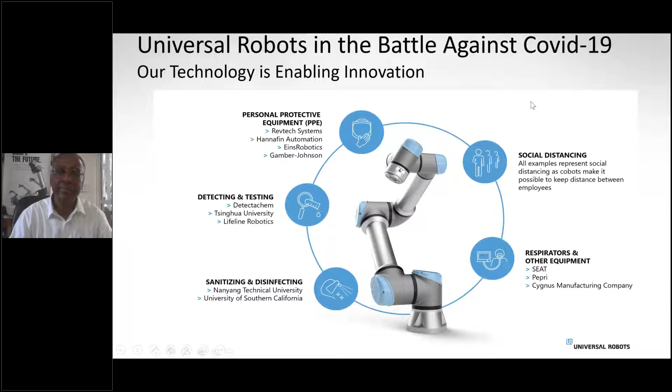Respirators, sanitizing equipment, detecting and testing - PPEs, cobots are being used for all these different kinds of things today. But we're here to learn about what it's going to do in our factories.

So there are 4 main things. I already talked about social distancing. While you see this lady in Bajaj working here, the collaborative robot is so lightweight it can be hung upside down from the ceiling, machine mounted, or pedestal mounted on the floor, using up very little space on your shop floor. So automatic social distancing, quick deployment and flexible redeployment.

This is a major one. You saw in the COVID slides, we were taking it and doing a disinfectant application. In fact, there's a company called SEAT in Spain that makes cars, and they took the collaborative robots that were doing screw driving, and moved them to make respirators about 2 months ago when Spain was topping the list. Once the respirators were made, the cobot was taken and moved back into the production assembly line.

So that's what we mean by redeployment. Did you ever think you can take a robot within a shift? The other operator calls in absent, a second shift operator, and I can move this cobot, like these people are doing in Chakan, from one line to the other, and it's now operational on that line. Or maybe my production run, I don't have that many orders on this particular VMC. I need to move to that CNC. You can do that. These are concepts you don't have with robots because they're pretty heavy, but a collaborative robot is a very flexible tool.

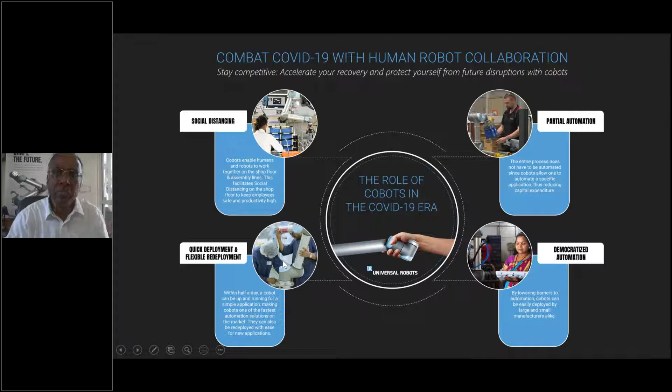It's like a human arm. It helps you. Here you can see the biggest one, the UR10, 10 kg payload. Two people are easily dismantling it, four screws, moving it to another location, choosing the program, and off and running. So if you're worried about the cost of deploying a technology like this, understand that you can mitigate the cost among many projects. It's flexible. You can redeploy it even within a shift, from location to location.

Bottom right talks about democratized automation. You see the lady who's actually programming the cobot with the teach pendant in her hand. She's no robot programmer, I can assure you. She's just the regular worker there at the Chakan plant of this SME, and she's been taught how to handle the cobot. So if you know how to handle a cell phone, you can pretty much handle a collaborative robot. It doesn't need a robotic expert.

And the top right is probably the most important concept, partial automation. So you all know when you do automation, typically 80% of the project can be done for 20% of the cost. That last 20% of the project is really expensive. Maybe you need to put a vision camera, some expensive equipment to get that last 20% of automation. Well, we're saying don't spend that money, don't spend that 80% of money, and encourage the use of partial automation. Have a human being for what he's good at, have a robot for what it's good at. The human and robot can work together in what we call HRC, human robot collaboration.

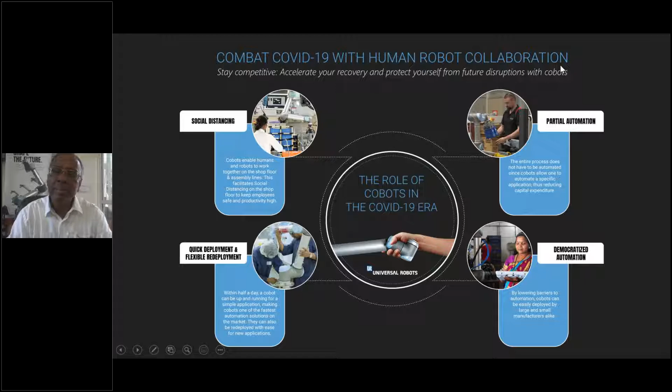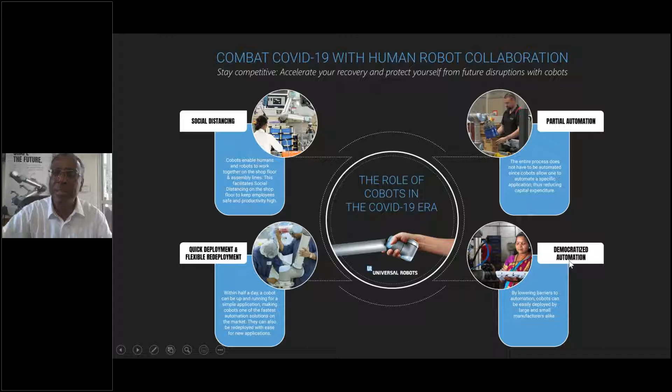So this enables you to embark on your journey of automation without having to worry about a 2 crore budget. You have 30 lakhs lying around that you can spend on a particular automation project. Get started with a cobot. So I don't think it should deter anybody. Like I said, it's democratized automation. Everybody can afford it. And as India climbs up the manufacturing chain, these kind of technologies need to be embraced.

So here's a typical example of a CNC machine on the left-hand side being serviced by a robot, an industrial robot. You have a big fence and space used up on the shop floor because it's unsafe, right? A robot is unsafe, we've known it to kill human beings. We're all familiar with the Maruti operator who got pinned next to a cage by a robot. And therefore, you do a collaborative robot, which is on the right-hand side. Notice it's on wheels, I can move it from machine to machine. I don't need to put a fence around it, because if it does impact you by any accident, it doesn't crush you in any way. Every motor size is designed to work safely with a human being. That's what makes it collaborative.

So flexibility, where I can move it around, extremely lightweight, easy to program, and no fencing required. These are some of the major advantages you can hopefully see immediately. The category of these robots are called power and force limited robots.

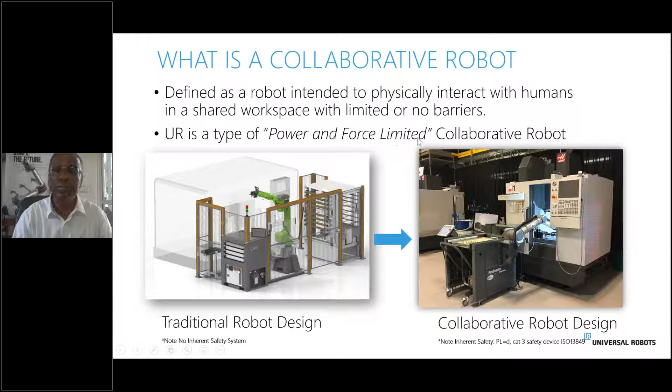This is a picture from Bajaj Auto. By the way, Mr. Rahul Bajaj had the vision of having 50% of his assembly line should be women, and we have helped him accomplish that. So by putting a cobot up here, you see the engine blocks of the 2-wheelers coming. There's a nut runner, there's a light and a camera that's looking at, okay, these 12 bolts need to be tightened. This lady used to tighten 800 bolts a day manually. It becomes very tough, probably becomes a manual job for a man generally. Today, with the cobot doing all the hard work, it doesn't matter who's working here, right? It could be from your pool of women labor or men. So women empowerment was a big factor in terms of Bajaj's usage of this technology.

It also, they told us, contributes to a clutter-free shop floor. By putting it up there on a small gantry, I don't use up any floor space. So clutter-free shop floor was another advantage that they pointed out.

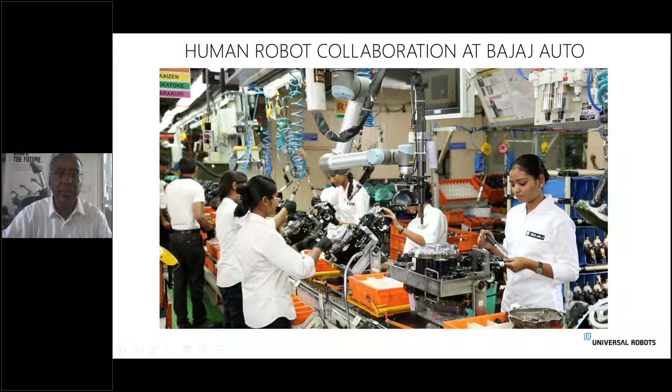So once again, if you're wondering what is the difference between an industrial robot on the left and a collaborative robot on the right, I think this picture says a thousand words. You don't need the fence. You can move it around. It's not a fixed device like on the left-hand side. I can move it from machine to machine, operation to operation.

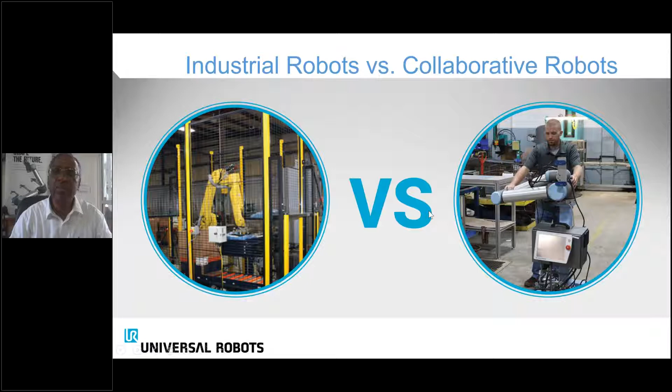I brought it home, by the way. I don't have three-phase power at home, but it's plugged in and it's working. So these are some of the advantages of a very flexible tool called a collaborative robot.

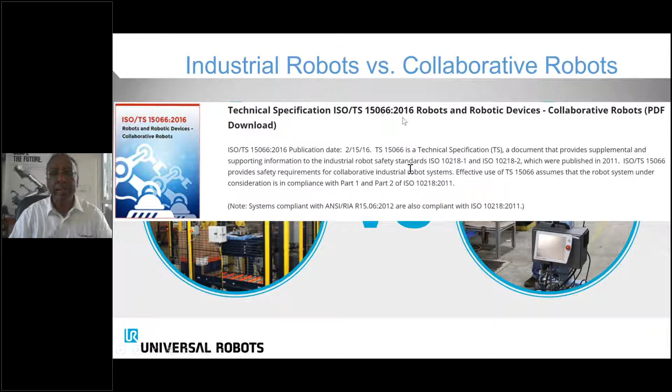If you're wondering if it follows all the standards, there's an ISO technical specification 15066 that was passed for robots and humans to work together. Before this standard, all the laws or standards were passed based on how do I keep a human being safe, how do I make sure he doesn't get crushed by that industrial robot. Well, since 2016, only 3-4 years ago now, this technology has come to the forefront where humans and robots can indeed work together.

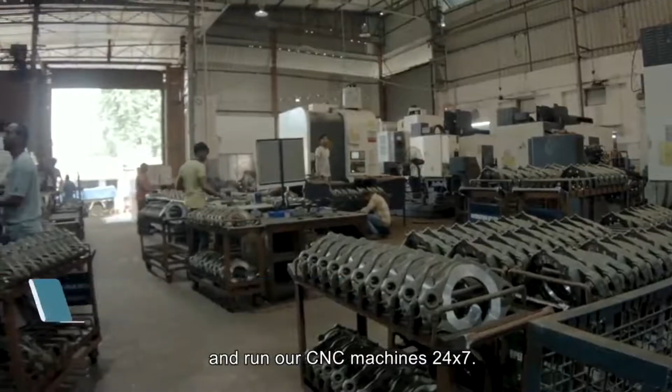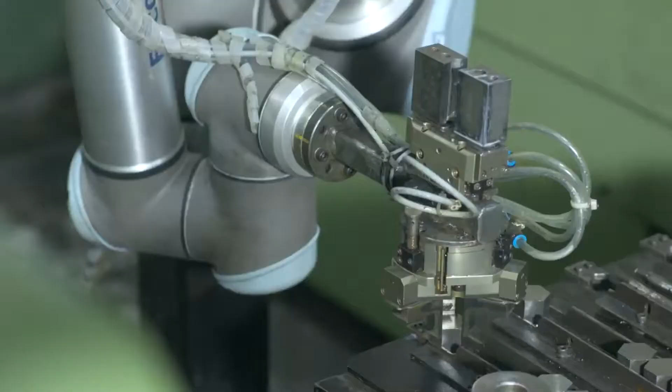It's been 1.5 years since we've been using UR cobots, and it's been a great experience for us. I still remember when I saw the cobot for the first time, I told my dad, this is what we need for our components.

We have two divisions - a small component division and a big component division. And for the small component division, I think there's no better robot in the country than UR cobots.

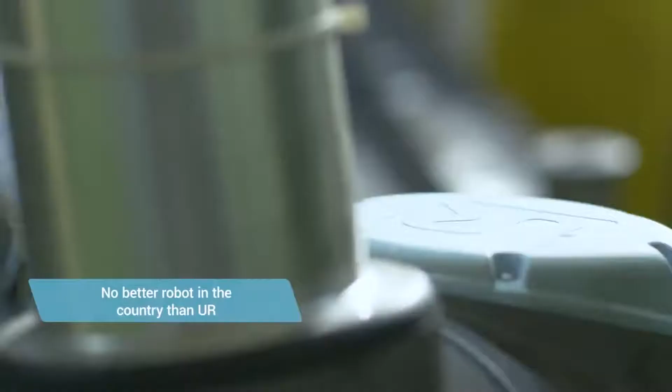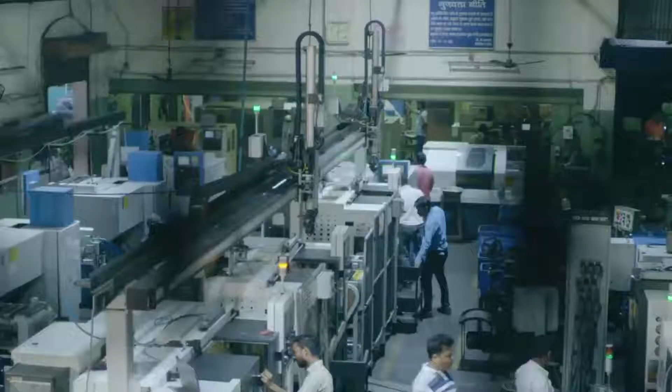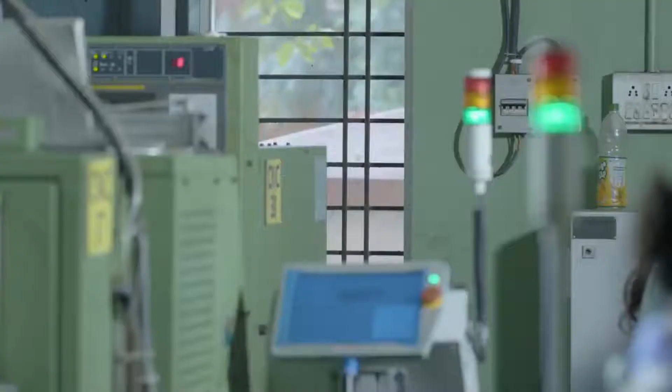When you're an SME, land is extremely valuable for you. Imagine putting these huge robots in your factory which take up so much space. You need to put a fence around it. Instead of 6 machines, you'll only be able to put 2 machines or 4 machines at max. But in case of UR robots, it can be fit into the space between 2 machines that you have in your factory. You just put it there, plug and play, and you're good to go.

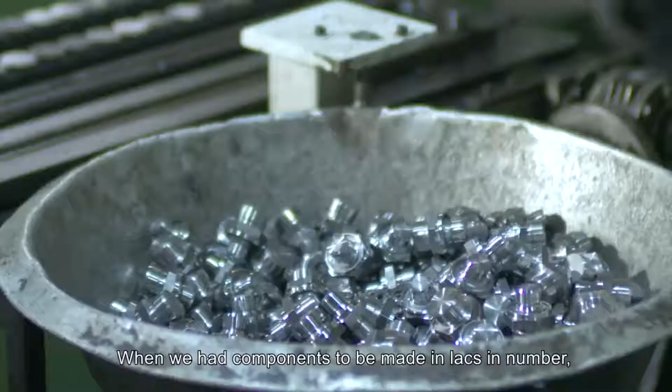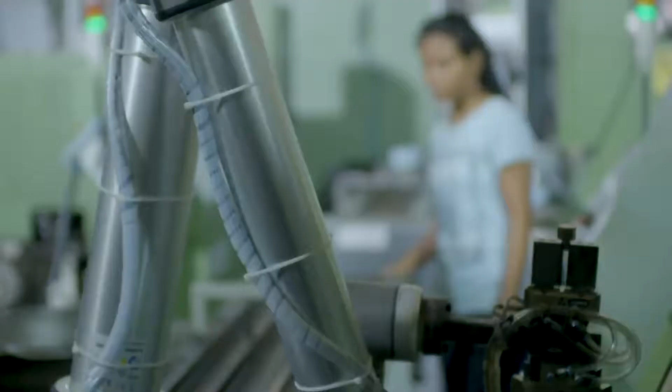They're actually cobots, collaborative robots as you call them, which work side by side with my workforce on the shop floor.

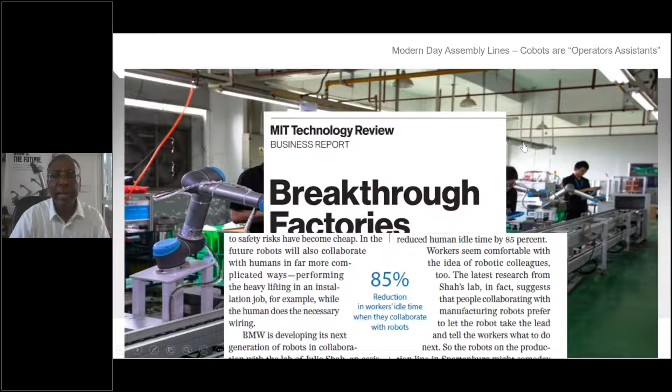Moving forward, you also see the man-machine assembly line of the future, wherein a human being and a robot, a human being and a robot, have automatic 6-foot distancing between the people on the assembly line. And not just that, MIT has done a study which shows that when you have humans and robots working together, you have an 85% reduction in a worker's idle time. So this is pretty significant, allowing us to bring efficiencies.

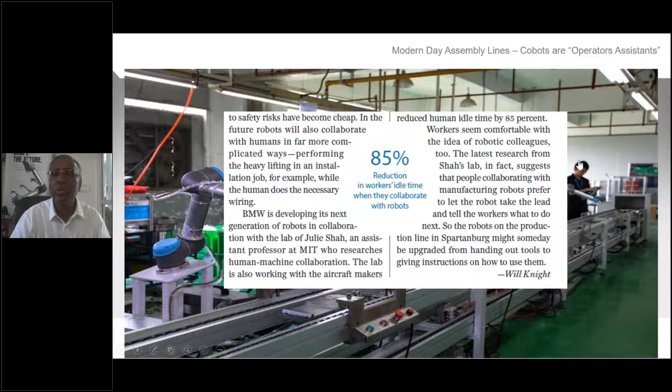As you try to be more efficient now, coming out of COVID, understand that having a human and a robot work together—shown by an MIT study, not a marketing study from our company—shows you can have an 85% reduction in idle time and the associated improvement in productivity and throughput. That's just one of the benefits. You have a lot of other benefits, like the quality of your product going up dramatically. It plugs into a single phase power outlet, like I've shown right here behind me at my home. It's very easy to program. It's got a teach pendant, and with this teach pendant, we can very easily show any operator how to program it.

I can actually show this to you today on how to program a cobot. Every axis will move plus or minus 360 degrees. This is unprecedented in the world of robotics. When you look at typical robots, the base joint may move from here to here, about 270 degrees. We're talking plus or minus 360, which is 720 degrees. Every joint can move like that.

What's the benefit for you? The benefit is it can operate in extremely confined spaces. In an MSME, space is huge and it's very important that we conserve as much space as possible. You can move it from location to location, you can mount it up there like Bajaj has done, and it consumes very little power.

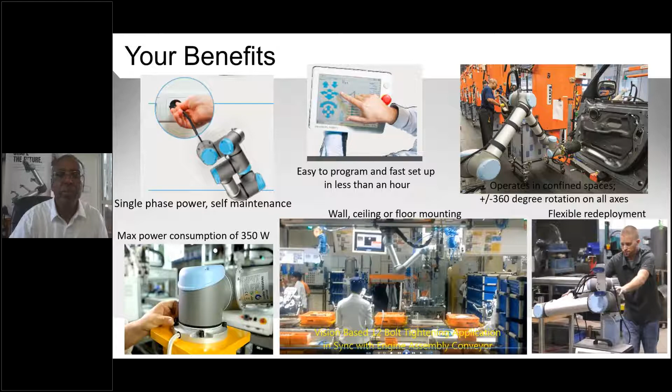The largest one we have, a UR10, 10 kg, actually UR16, will probably consume about 350 watts. A typical UR5, which most people use on CNC machines, 5 kg payload, will only consume 150 watts, like the light bulb in your office. 150 watts is all it consumes. So extremely efficient in terms of energy usage too.

But don't let all this simplicity fool you. There's a lot of technology that's gone in to give you this capability. In fact, there are 65 patents built into the product in robot safety, construction, trajectory control, etc. No less than 65. And we have over 45,000 deployed in the globe today, so it's not like you'll be the guinea pig trying this out.

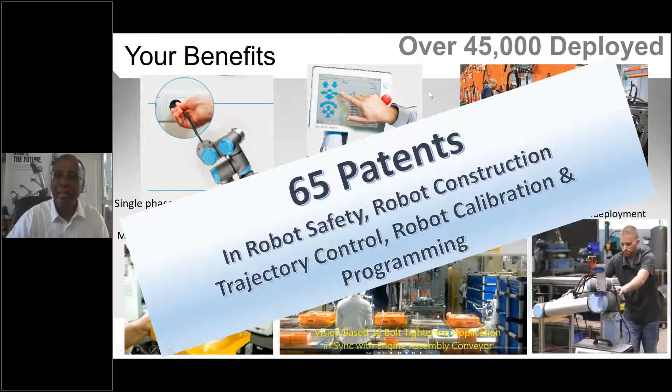We have many installations in India also, like this picture will show. These are small SMEs around the country, Craft and Technik. They make products that mostly they export, for aircraft parts and those kind of things.

New Engineering Works, the middle one on the top, I think you heard the story. They're making small components for commercial vehicles, Tata. Bottom left, Shruti Engineers, a small company with about 20 people and 10 machines. They put a cobot to load and unload to make it easier for the operators, to improve the precision of the operation.

We have a customer in Gurgaon who got tired of the quality when he had a painter doing the painting application. You had to do 8 coats of paint, and after 6 hours of work, maybe they put 8 coats or they do 6 coats. Either way, it will be rejected when the etching goes on. He had a lot of problems with quality. When you put a robot, you tell it to do it 8 times, it's going to do it 8 times, from part number 1 to part number 1 million. So quality just goes up through the roof.

And for ergonomics, the bottom right one is a dal manufacturer in Chennai. This lady used to carry these dal packets and put them in a sack one by one as they came off the assembly line. Now the cobot picks up the dal packets and puts them in a sack. All she has to do is drag the sack out and put a new sack in every so many minutes. So great stories on SMEs using it.

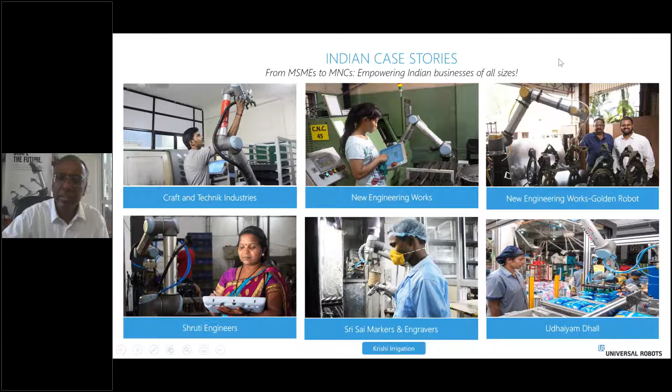I also want to share 2 major concepts of collaborative robots. One is called partial automation. I've already explained this, where you don't need to spend the big money, say 2 crores of rupees, to do complete automation. Like this operation you're seeing, you may ask why is the man there, couldn't we have automated that, couldn't we have had something make the box? Notice the little cardboard box lying at the back, you could have put a conveyor to bring it automatically. Sure, but then your cost would have gone up. So we're saying, no problem, you've got 25 lakhs to start with, put 25 lakhs in, put a UR5 in, put some simple collation process, have the human being there, and I've brought a cobot into my factory.

I'm getting the benefits of a cobot, of Industry 4.0, of one of the top 50 technologies. And I'm getting my people used to working with a cobot, human and robot working together, heavy lifting being done by the cobot. Maybe as this progresses, I can put another cobot in. So this supports the concept of partial automation. You can get started small.

And on the right-hand side, I love this concept of flexible automation. This is in a cosmetic company. Notice there are 2 robots on this trolley, one is a UR5, 5 kg, and one is a UR3. And they happen to have about 12 presses. They make cosmetics like powder puffs and lipsticks and all that kind of stuff, a company called Coty.

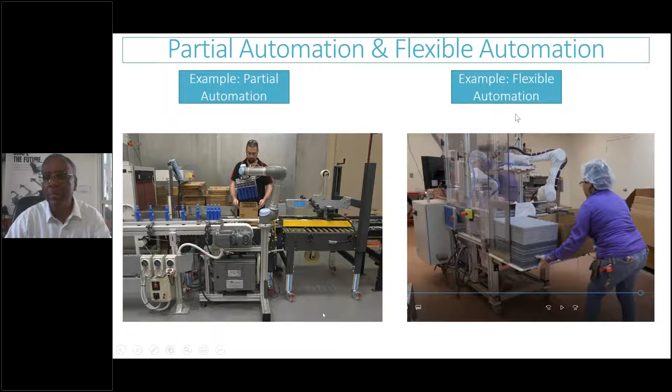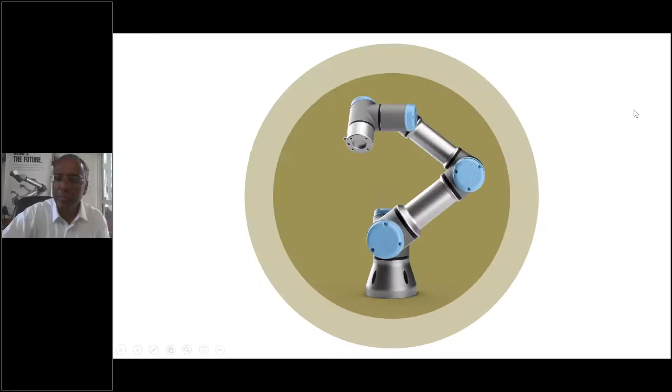There's one testimony I'd like to share. Dell, a customer in Chennai, makes servers and laptops. Here's what the plant manager has to say: 'Our first cobot, installed 3 years ago, is on a very high flow line with 3 to 4 units every minute. This means the single cobot has gone through over 1 million production cycles to date with zero downtime. Reliability is one of the biggest positives.' That's Mr. Navneet Kejriwal, the head of manufacturing, commenting on his experience deploying cobots. In fact, he's a hero in Dell now because they have 10 plants around the globe, and he was the first to put in a cobot. Today, all 10 plants have cobots after seeing what the Chennai plant has done. It's a very proud moment for us in India, showing the other plants what can be done.

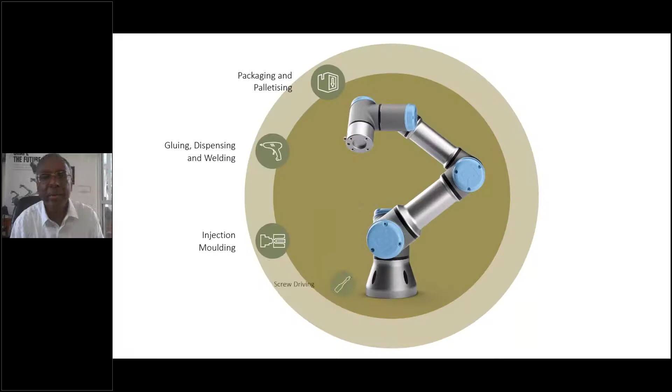Assembly, where I need to put parts together. This little device called Alexa that you have at home—you talk to it and say 'Alexa, play so-and-so music track for me'—that assembly has been done completely by cobots.

Pick and place: from a conveyor, taking something and putting it somewhere else, a very common application. Quality inspection: I put a camera at the end of the cobot. BMW, for example, uses it to measure the distance—the gap, as they call it—and it's exactly the same whether you look at the bonnet, the trunk, or the doors. So they're using cobots with a laser to inspect the gap, and if it's not the same, it goes for rework.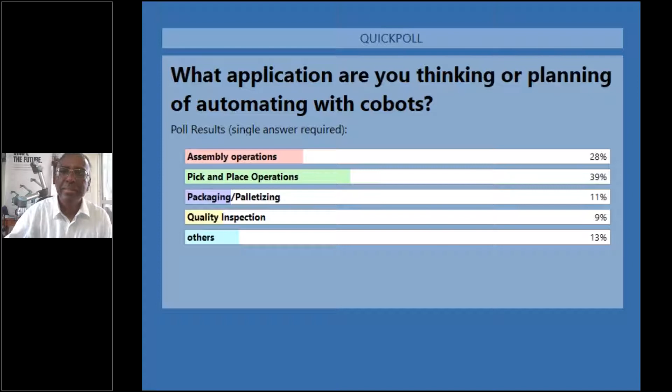Some of the benefits you are getting by using a cobot, let's say pick and place was the major application you mentioned, is increased capacity, so your throughput can definitely go up. We've also seen a dramatic improvement in quality. In many cases, our customers are telling us, I've had 0 quality defects once the cobot was involved in the manufacturing.

Because we all know that human beings, while we're extremely good and extremely smart, after 6 hours of repetitive work, we get tired and we make mistakes, right? Sometimes deliberately, sometimes not, but quality does suffer, and it's the owner of the company that suffers because of that. We've seen cobots minimize waste, and I'll let you read these, some of the benefits.

It's quite obvious, but these are the benefits that our customers have told us about.

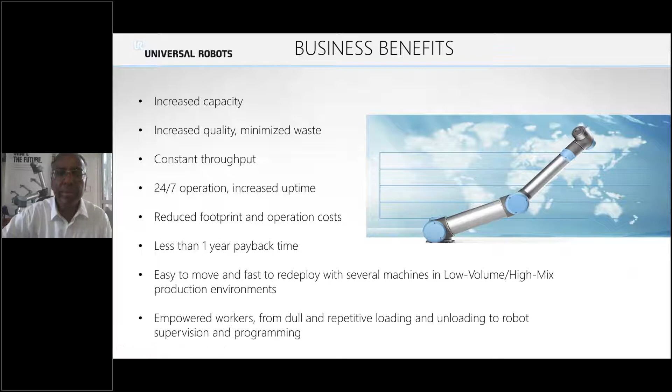This is just an ROI calculation of a new engineering works, an SME. He took a 30 lakh loan, and had he used labor for 3 machines, 3 shifts, he would have paid 10 lakh 80 thousand per year one, with a 10% escalation in year 2 and year 3. But because he borrowed 30 lakhs from the bank, paying interest of about 15%, with depreciation of 15%, in year 1 itself he had a positive cash flow.

Had he had labor, he would have paid 10.8 lakhs. If he had just the cobot, his costs were 9 lakhs. So even from year 1, he had a positive cash flow. In fact, he paid off the entire 30 lakhs within 2.5 years. In his case, after that, he's been printing money essentially.

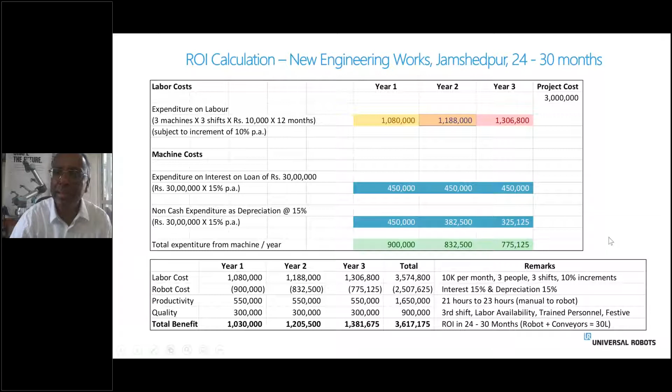In fact, this guy, within a month, I got a call from him after we put the first robot in, and he said, boss, I need you to come urgently and put 5 more in. We suddenly realized that we are leaving money on the table. I need to put a total of 6 robots. My bank has sanctioned this loan, please come and do 5 more. So that was a great story for us, which is why we have made a video of it.

Some of your questions may be about the robot itself. Notice that we talk about a UR3, which is a 3 kilogram payload, which basically means, let's take a UR10, a UR10 can carry 10 kilograms at this point, and about 200 mm offset from that flange also.

So 10 kilograms means your end of arm tooling and the payload. You can probably lift about 8.5 to 9 kg payload with, let's say, a 1 kg end of arm tooling.

Now, yes, we can go up to 16 kilograms. In the case of the 10 kg payload, we can go up to 1.3 meters reach, the working radius, which means the diameter is 2.6 meters.

Each one of these, and by the way, why is the E? E is the latest version, just like your cars, you have a BMW 3 and a 5 and a 7, same way. We've got our 5th generation of product, which is our most modern product with the best functionality, touch sensitivity at the end. It's called the E series.

We also have just the UR3, just the UR5, and just the UR10 without the E. We've been selling that for the last 10 years, it's still very popular in India. Obviously, the cost is much less than the E series. But if you're into R&D and looking at some of the more higher end applications, you may want to look at the E series.

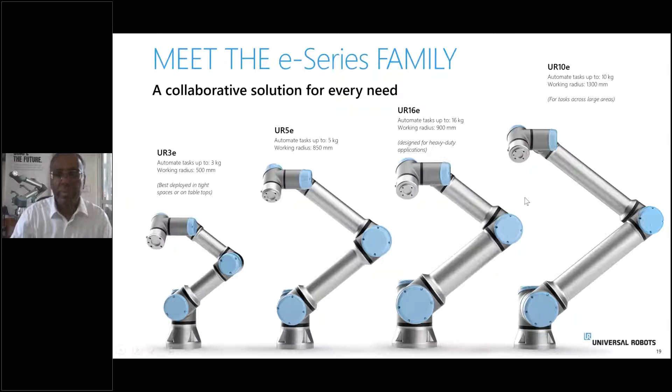I think it will contribute across all manufacturers because you now have a larger pool of labor to choose from, especially nowadays when it's tough to find labor.

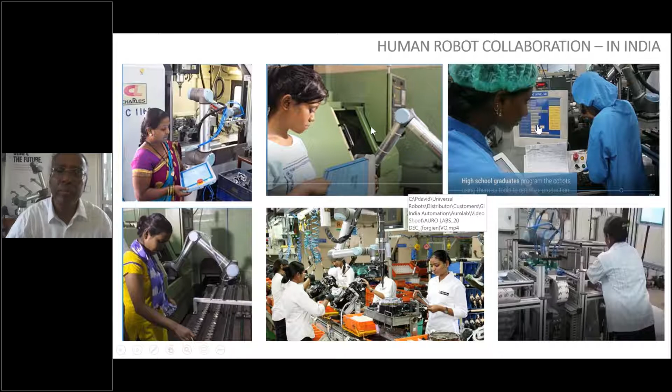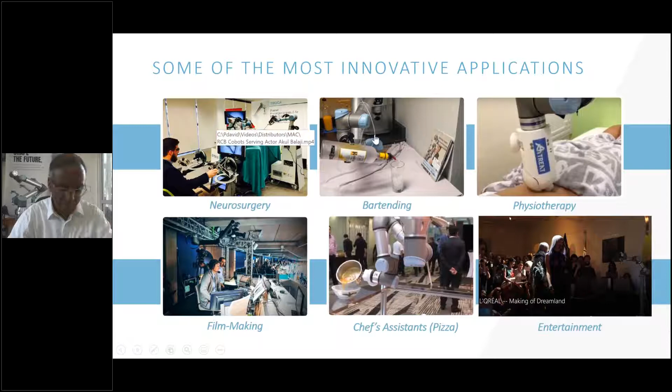It can be used in many applications. We've used cobots in neurosurgery, in bartending, in physiotherapy, in kitchens. In Bombay, for example, there's a cloud kitchen that was having problems with consistency of the dough. How do I make the pizza dough consistent? First shift makes it different, second shift makes it different. So they took a cobot to ensure the consistency was the same.

Very ingenious applications. The Bajaj example I'd give you is they bought one robot, I think in 2012, and the very next year they bought 23 robots. Why? Because they bought it for their R&D center, and they suddenly realized, hey, this is so easy.

I can make it do dispensing. I can make it do my decal application on my petrol tank to put that sticker. I can use it for dispensing the sealant, for welding, for picking and placing, all that stuff. So typically an R&D group, if they get their hands on something like this, understands the application better than anybody else. You'll be able to figure out many uses for this tool. Once again, I call it a tool, not a robot. It's really a very functional tool that you can make do exactly what you want it to do.

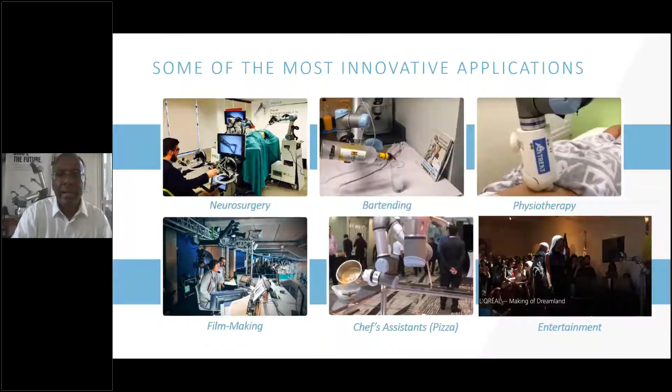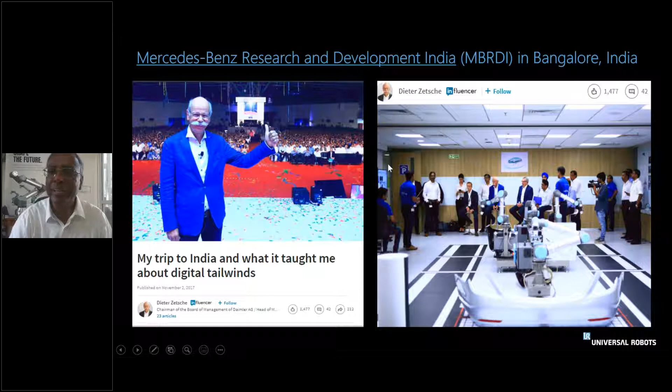So do we have much more history? No, unfortunately we're only a 10-year-old company, but we have good reliability on these machines, and if you treat them well—in other words, clean them a little bit, there's no real maintenance involved, there's a fan in the control box, make sure it's not clogged with dust, some basic things like that—it will give you extremely good service.

This is a little technical. I don't know whether you want to get to this level, but if you're interested, I'm sure you'll call us and we'll talk in more detail about the E-Series, which is our flagship product.

I think the main thing is robots generally don't have a sense of touch. We have now taken a force torque sensor and put it right here, which means, for example, I just got a customer recently in Delhi who has a gear and a spline, and he wants to align the gear wheels with the spline and then push the two together. Now that requires a little bit of forcing and seeing—oh, it didn't work, then move it, then force it again. A force torque sensor is ideal for such applications. Just like a human being has a sense of touch, the force torque sensor gives the cobot a sense of touch.

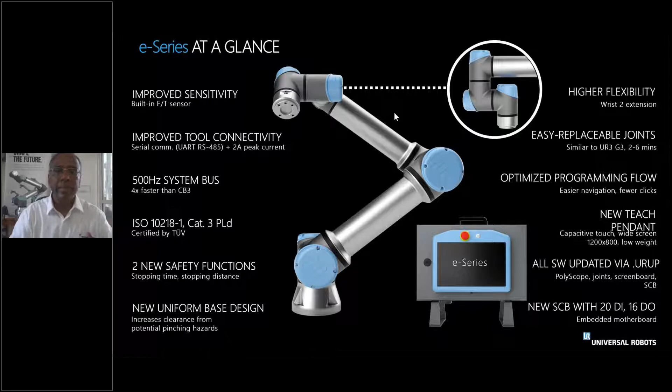Is that from Universal Robots? No, it's from a third-party supplier who took our software. He has developed his own intelligence, like Schunk has done with their 2-jaw gripper, and he has created a tool for you to use. That is called UR Plus.

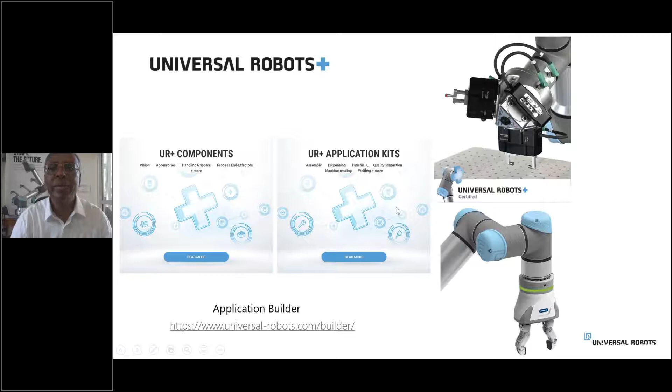All the software to configure this will show up on my teach pendant. That's how we certify that it works with UR. So if you teach your operator to use our teach pendant, you are teaching him how to use a third-party device, whether it's a gauging system, 2D cameras, 3D cameras, 2-jaw grippers, 3-jaw grippers, sometimes not even electronics. Some people say their operator drops the teach pendant on the floor and cracks it.

So someone has produced a nice little jacket or shield for it. Things like that. All these things that we don't do as a robot company, we want to be the best platform for you to use, and we expose it to third-party vendors to give you the things they're experts at. Haptic gloves, software to do remote monitoring of the robot - all that is available through what we call UR Plus.

It's coming up to an hour, so I'll take a few more minutes. If this is interesting to you, we have something called an Academy - UR Academy - in which, in 87 minutes, you can become a programmer. Just go to our website, Universal Robots, click on education, and there are 9 modules you can go through free of cost. Learn how to create a program, how to attach an external device, how to set safety settings for your operator, and within a few hours you will learn how to do this.

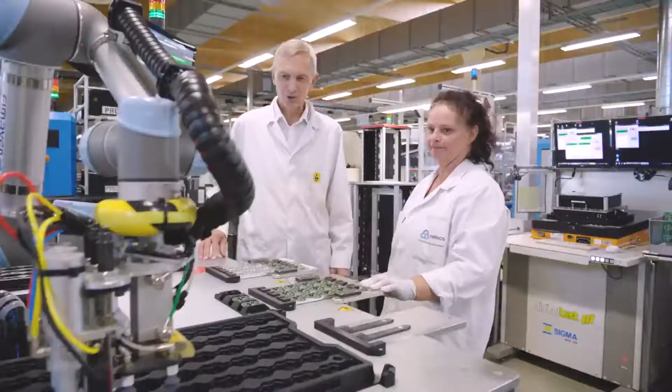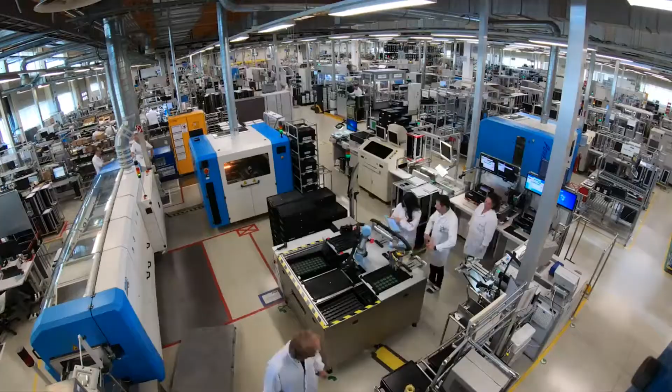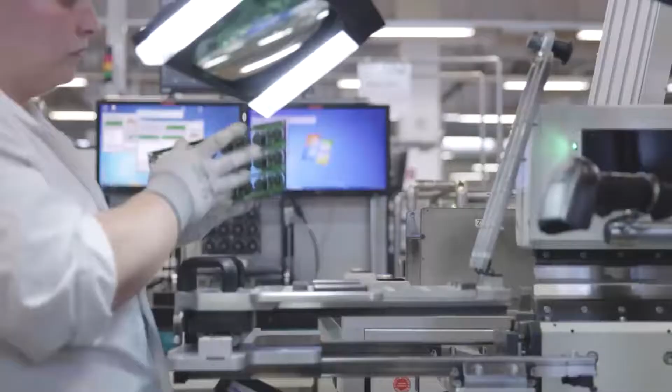Your car contains a lot of electronics. It is quite possible that some of these components were manufactured by cobots at Siegendorf. Melecs is the largest service provider for electronics development and manufacturing in Austria. We are the market leader in products such as control units for intelligent all-wheel drives. Besides original equipment manufacturers, Melecs customers are mainly automotive suppliers, with Melecs being their single source provider of the entire value chain - from development, validation, industrialization, production and logistics. Melecs offers zero defect quality and 100% delivery reliability at competitive prices. This can be guaranteed only by automating as cost efficiently as possible.

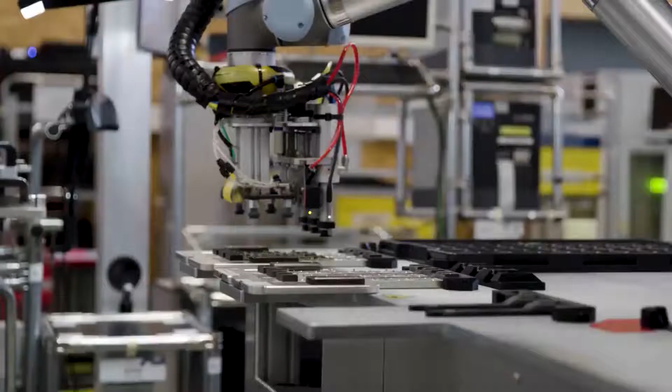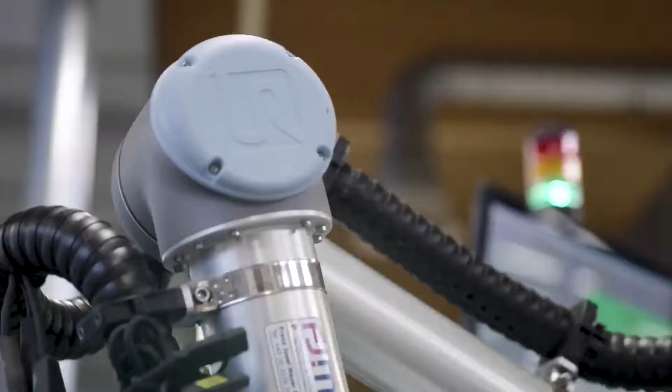That's why we use a cobot from Universal Robots here for packaging small electronic components. Cobots are cost efficient, easy to use, and we can realize projects directly with our own engineers. In addition, we relieve our employees of monotonous tasks. The UR5 handles packaging tasks. Our primary goal here was to meet the cycle time - the target is to pack each PCB module in 3 to 4 seconds. With support from the Fraunhofer Institute, we were able to realize this project successfully.

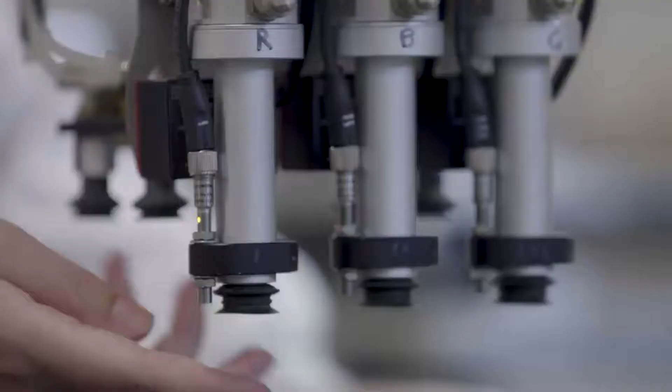The cobot is equipped with a gripper specifically developed for this application. After depanelization, the employee places the PCBs in the robot's working area. The robot then scans the PCBs, picks them with the flow gripper, and places them in a tray. Once the tray is fully loaded, the robot grabs it with the vacuum gripper and places it in a box. As soon as a box is fully loaded, the robot closes it and makes it ready for delivery. We were able to transfer the monotonous packaging work from the employee to the UR, enabling us to use our employees in more profitable ways elsewhere. The bottom line is a 25% increase in productivity in this manufacturing cell.

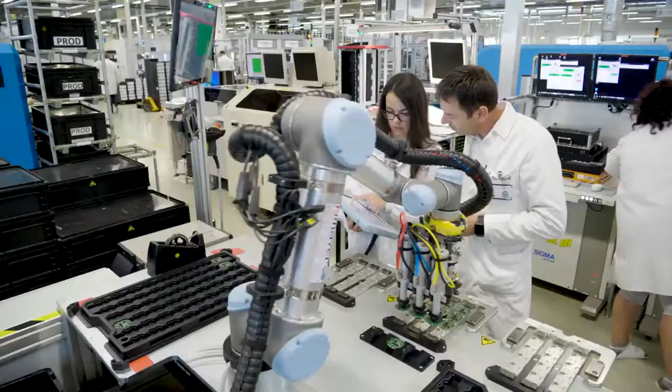The cobot moves slower in the areas it shares with humans. We also cushion the gripper tips so the employee can work absolutely safely next to the robot.

To me, this project proves that it is possible to realize really short cycle times and high volumes with collaborative applications. The project was very successful. The system runs reliably in production, and we were able to achieve a clear competitive advantage. We package 2 million products per year more cost efficiently than before. Due to the success of this first implementation, we will use cobots again for our next automation projects.

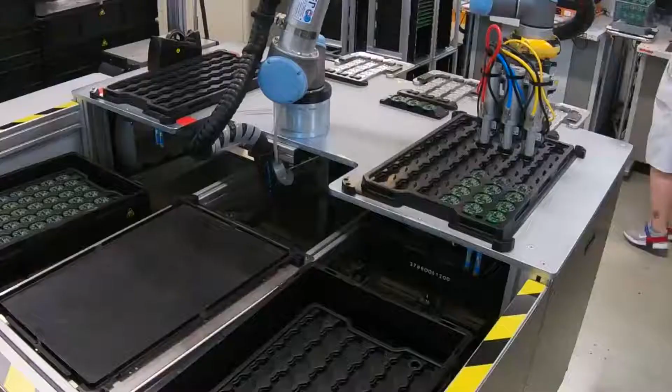After being packaged by the UR cobots, the circuit boards find their way into cars all over the world.

Thank you. That was good. And...

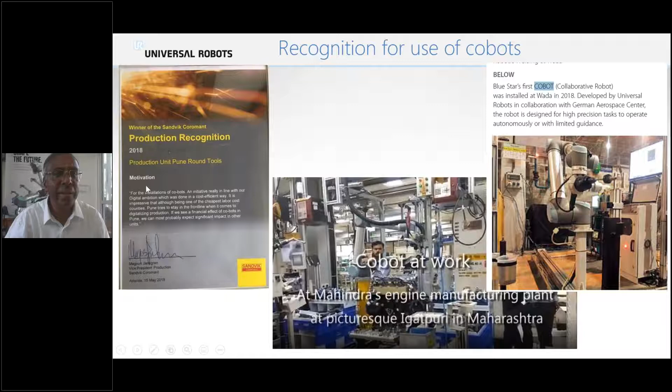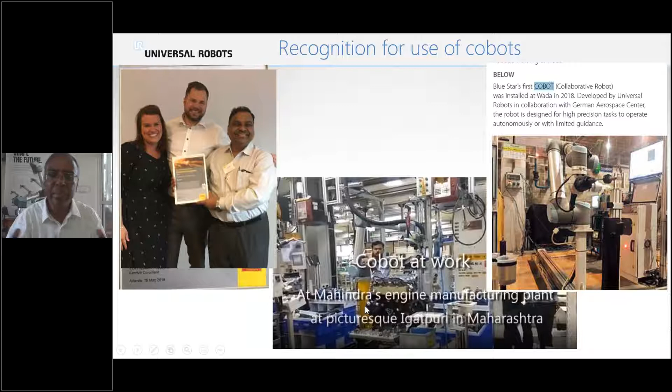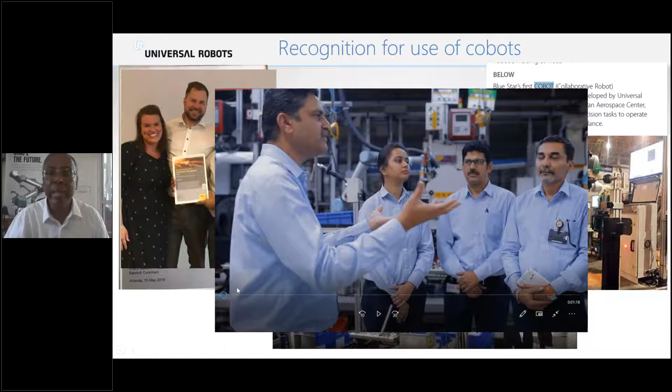In India, I'll give you an example. On the left side, Sandvik decided to put some cobots in, and their person was immediately awarded something from their Asia Pacific head as appreciation. The middle one is Mahindra. They have a nice video on the Igatpuri factory, a green factory, and their plant manager, Mr. Deshmukh, talks about collaborative robots and how much it has done for them in their manufacturing efforts. There's another one with Blue Star.

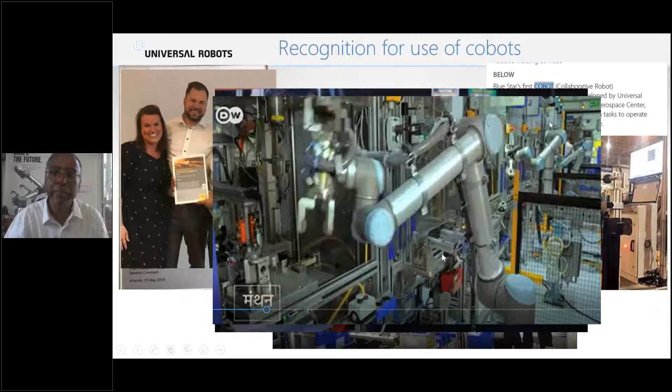It has come up in Deutsche Welle. It was a Hindi Manthan program on Deutsche Welle, wherein the cobots were portrayed by Bosch. They themselves have shown their video, and Mr. Rajendra Basavaraju talks about how much cobots have helped their manufacturing operations and Industry 4.0. This whole segment was on Industry 4.0. So I think anybody who has embraced this technology and worked with us on this has really had dynamic growth within their organization using this technology.

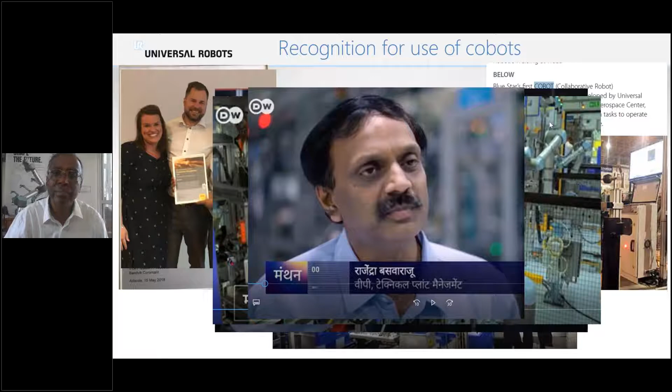People really appreciate what this can do for a country, not just from an SME perspective, but the fact that this is a tool that, if embraced by the right people, can thoroughly improve their productivity and their quality. It's been accepted at the highest levels, as you can see.

So if there's anything I can ask you to take back from this seminar, it's one thing: don't think of it as a robot. A cobot is just the next part of your toolbox. Just like you have a wrench, a hammer and a screwdriver that you move from location to location as and when you need it, the operator of the future, maybe 5 or 10 years down the road, you're going to give him a cobot, because with that cobot he can do dispensing, pick and place, machine tending, and so many different applications like inspection.

So to get started, I think the important thing is to get this in the hands of somebody smart in your company, your R&D team, your project engineers. You will be surprised at the number of applications they will find for a cobot within your plant.